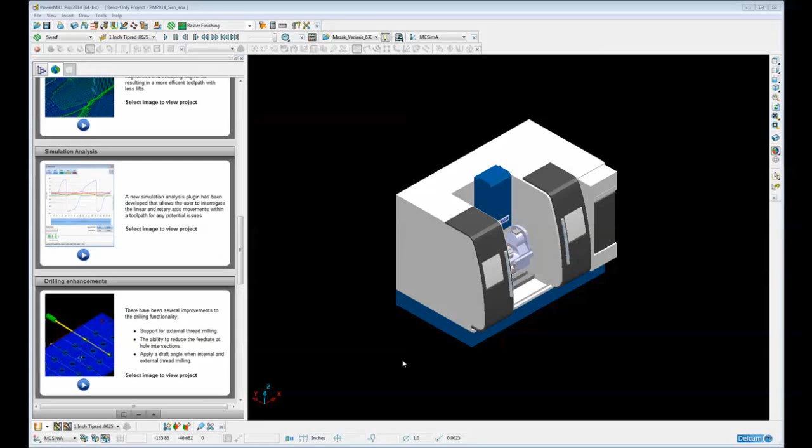A new plugin has been developed that allows us to analyze the machine tool simulation so that we can interrogate the linear and rotary axis movements within a toolpath for any potential issues such as axis reversals, for example.

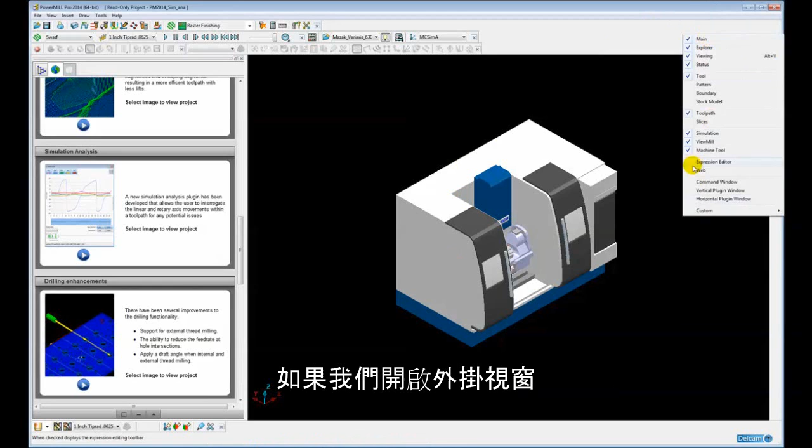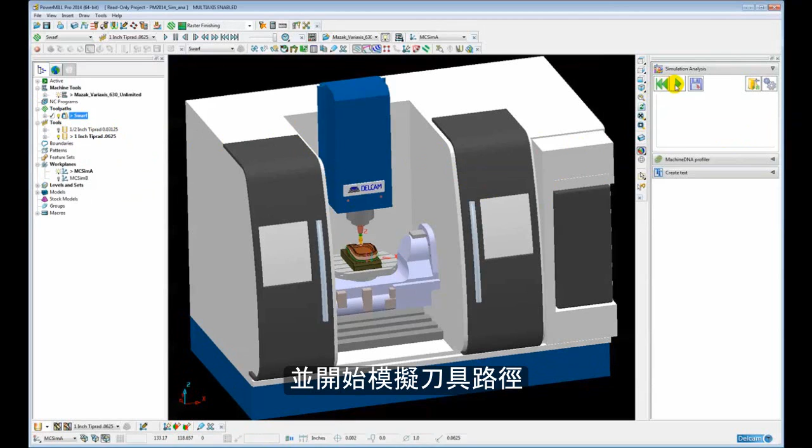If we view our plugin window, here we can see the simulation analysis plugin at the top, and we'll just go through an example of how to use the plugin. So if we simulate from start, activate the toolpath and then simulate from start, and then save the simulation,

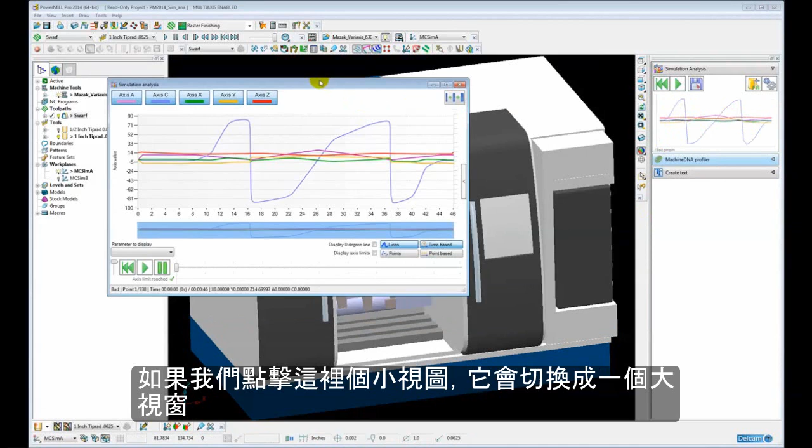you can see a line graph is produced for each individual axis. If we click on the small view here, then it brings up a much larger window. So each individual axis is drawn in a separate colour, and we can plot the axis angle against the time or against the number of points in the toolpath.

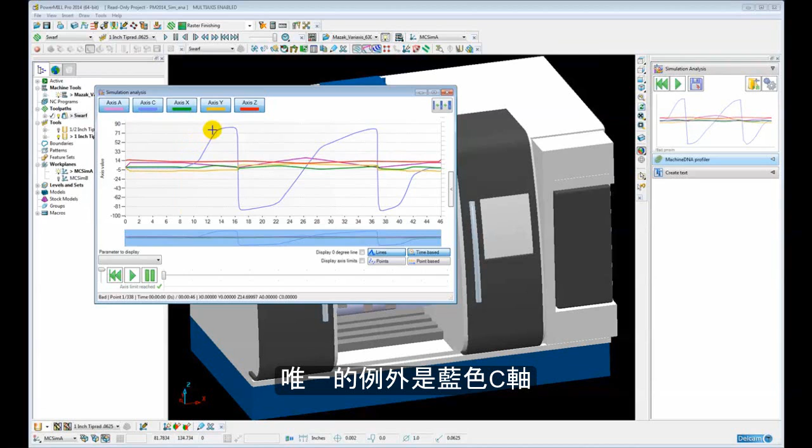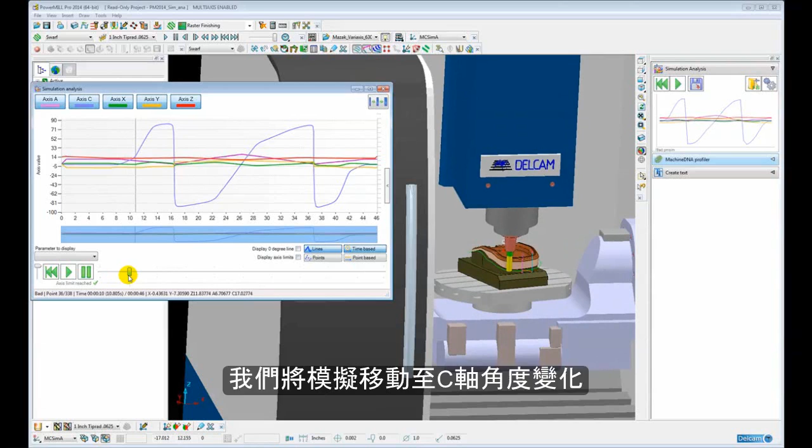So if we look at time based, we can see here that most of the axes are well behaved, with the exception of the blue line here, which is the C axis. So the C axis is the rotary table on the machine. So if we just fast forward the simulation to the point where we get these large dips and large peaks in the C axis.

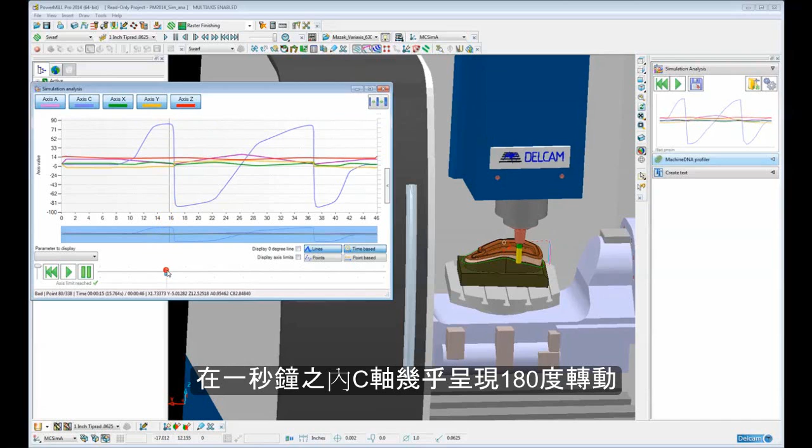So you can see the C axis is rotating positively, and then all of a sudden it reaches this peak of around about 82 degrees, and over the time period of what is literally 1 second, we have a full almost 180 degree swing of the C axis from positive 82 degrees to negative 87 degrees. This all occurs over a very small distance, over a very small period in time.

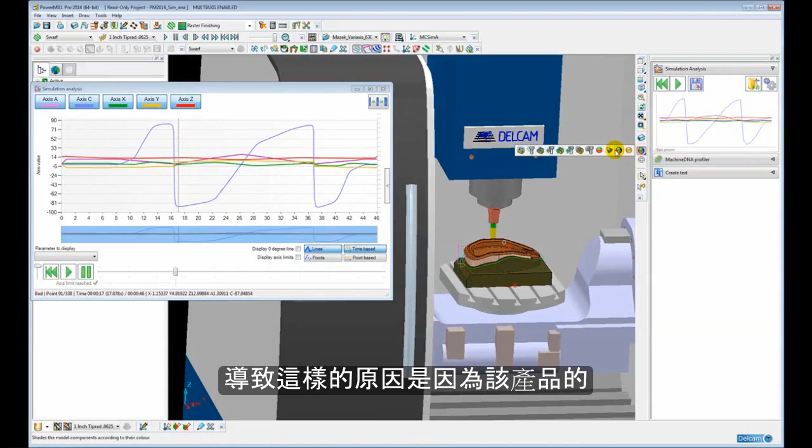The reason for this is because of the design of the part, where the draft surface on the side of the part goes from positive to negative. And because of this positive to negative shift in the draft, the machine tool has no choice but to swing through 180 degrees with very little movement across the surface of the part.

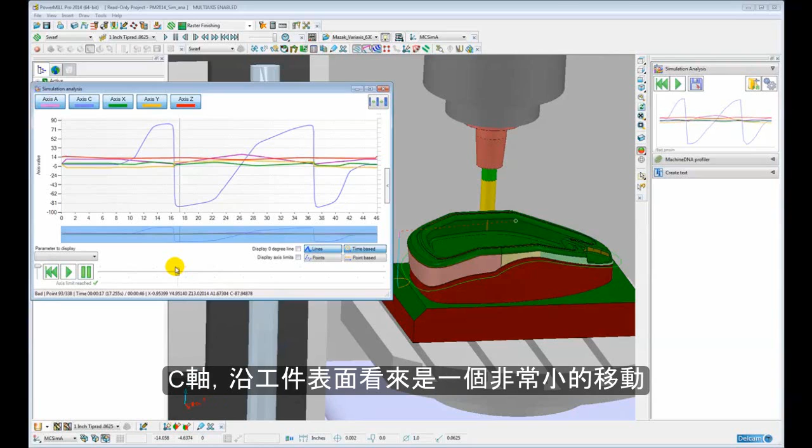So this is going to lead to potentially a very bad surface finish in this part, because we have a very rapid movement of the C-axis but a very small movement along the part surface. So this is obviously easily identifiable using this new simulation analysis graph.

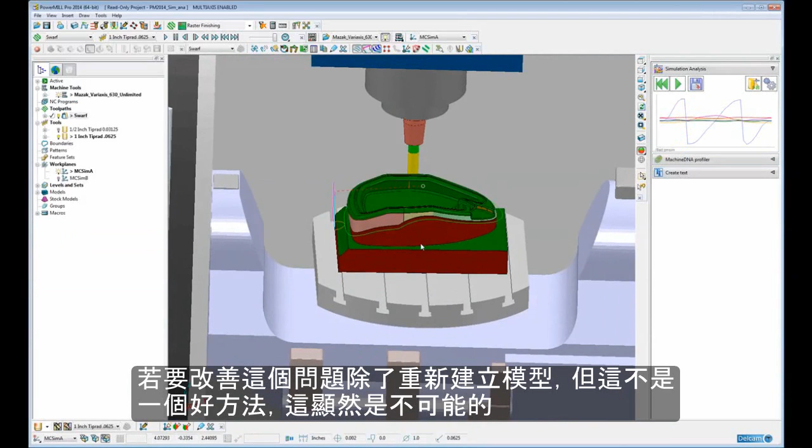So let's have a go at getting rid of this sudden swing in the C-axis. Now the only way to achieve that would be either to remodel the part, which obviously is not possible in a lot of cases, or to reorientate the part on the table so it doesn't go from this positive to negative draft angle.

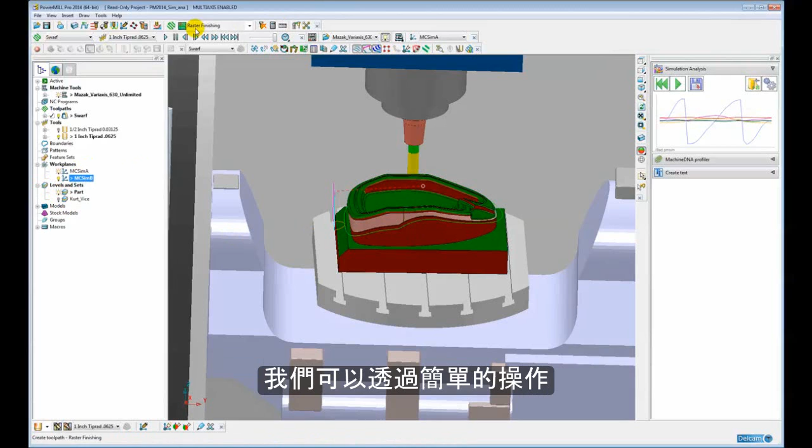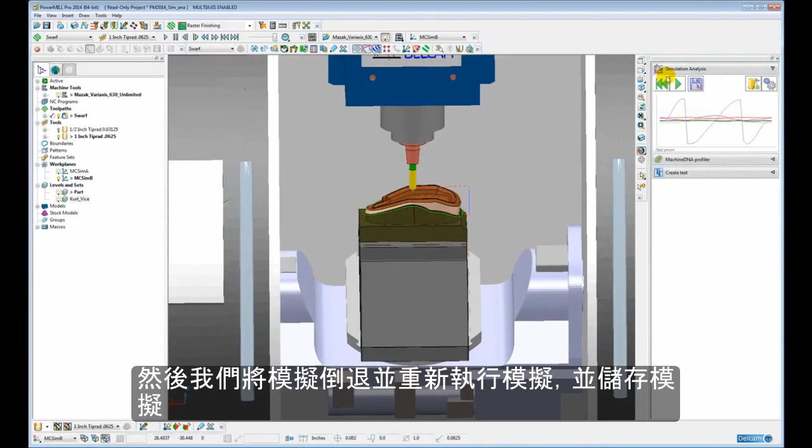And the way we can do that is by simply using a different datum orientation and to position the part on an angled vise, like so. So now if we rewind the simulation and replay the simulation and then save the simulation again,

and then view the analysis, we can see now that the C axis is far more controlled and has none of the peaks and troughs that we had in the previous toolpath. So if we now just play the simulation again forward, we can see at the point where we had the sudden swing in the C-axis, it is now nice and controlled and there's very little or no movement in the

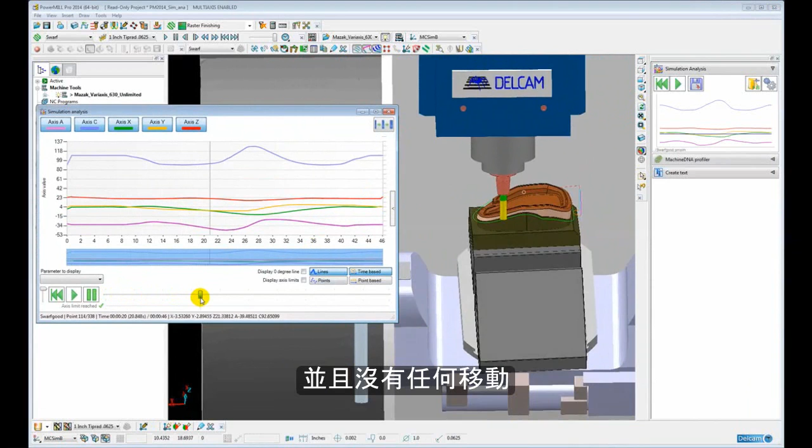C-axis. The only time the C-axis now is rotating a large amount is when the tool has to swing around the front, but again it's in a controlled manner, and back to the beginning.

So the simulation analysis graph is a great visual tool for easily identifying any potential problems with our toolpath in terms of possible surface finish issues or axis reversals.